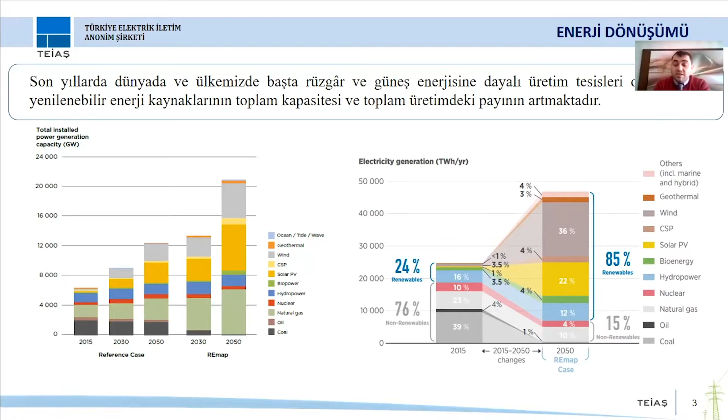When we look at the share of renewables in total generation, we have 24% from renewables at the moment, but in the future the share of renewables will increase to 85%. More than 50% of this will be coming from wind and solar energy.

When we look at the last 5 years for Turkey, we can say that in 2016 the total grid installed capacity was about 73,000 megawatts, and 41% of this came from renewable resources, out of which about 57% came from solar and wind power. But as of April 2021, the total installed capacity is almost 100,000 megawatts, or 96 gigawatts, and the solar and wind capacity has increased by 15%.

So in the upcoming period, for the solar and wind capacity, currently we have allocated 18,000 megawatts for wind and 12,000 megawatts for solar. For the coming period, within the existing grid structure in this energy transformation, the renewable energy resources, especially the solar and wind energy capacities, are going to be addressed in terms of finding solutions for the generation issues.

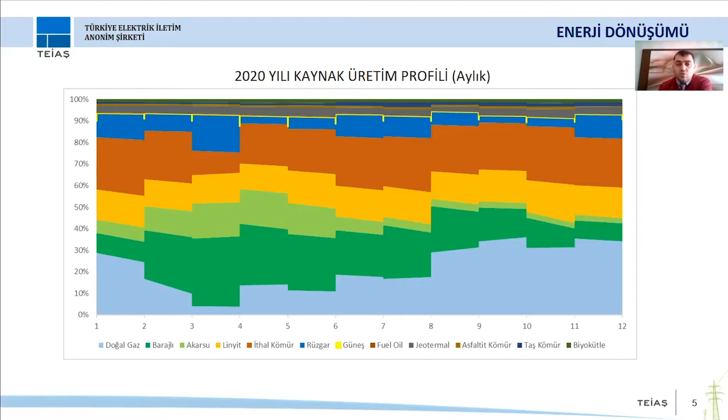So these capacities, according to future wind and solar capacities, we can say that in the future we're going to have more of these challenges. When we take a look at the solar and wind penetration compared to conventional resources, for 2020 the maximum wind and solar generation, hourly generation and penetration, was about 23%.

But we also have to say that generally when generation is low, the penetration of solar and wind is kept available at all times, and when we have minimum consumption and maximum solar and wind generation, the grid operation or management will be difficult. This is what the graph shows us.

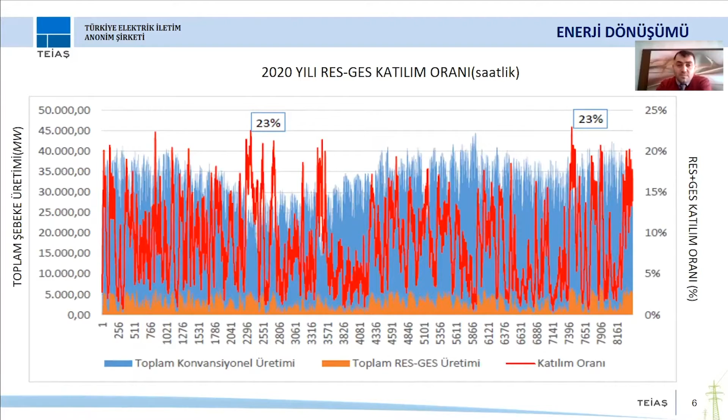So what is grid flexibility? It's about managing the demand and supply with minimum cost in the best feasible way. So we have this increasing renewable energy and these changing generation conditions. We need to increase the flexibility both on the supply side and demand side.

For instance, for the net load, we need to be able to monitor the supply according to the net load and manage the demand accordingly. But of course, what we need to do is make sure that supply is provided at all levels of the grid. So in grid operation, we need to invest in the grid operation and expand the grid accordingly through investments.

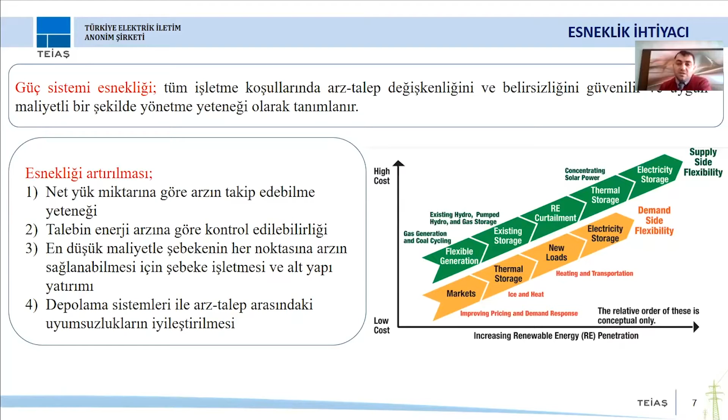But these unbalanced scenarios, coupled with increasing demand, require certain changes. There might be some restrictions in the wind or solar energy generation, or we can overcome this lack of balance through storage facilities. On the consumer side, again, storage facilities and systems are going to be an important alternative. And of course, in systems where we can control the market participation of consumers, we can increase flexibility.

Let's take a look at the energy storage systems. What are they and what's their role in increasing the flexibility?

We can assess them from two perspectives. One is that energy storage can take place in the form of storing the energy and using it whenever needed or required, or the electricity generated through the energy resource can be stored. So there are two ways of energy storage: it pertains to consumption and generation. There is a two-way utilization of this, and in terms of grid flexibility, this is an important opportunity.

So energy storage systems and methods can be classified under 5 different groups: electrochemical storage, mechanical storage, chemical storage, thermal storage, and electrical storage.

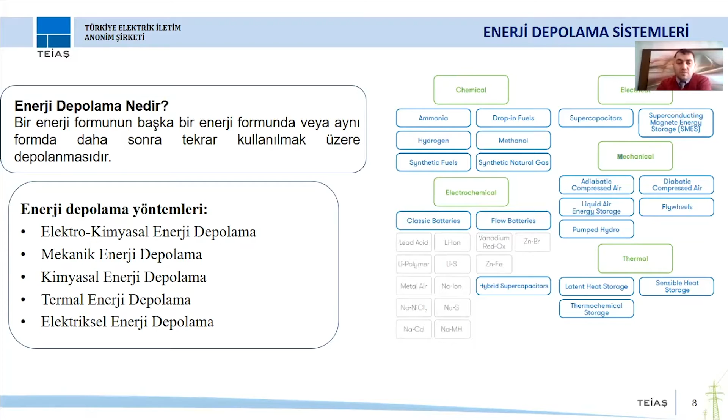So these are the methods for storing energy. Briefly, let's go through some examples. Mechanical storage methods are composed of pumped systems and compressed air storage, and then we have thermal storage carried out through molten salt, heating or cooling through concrete, or other thermal methods.

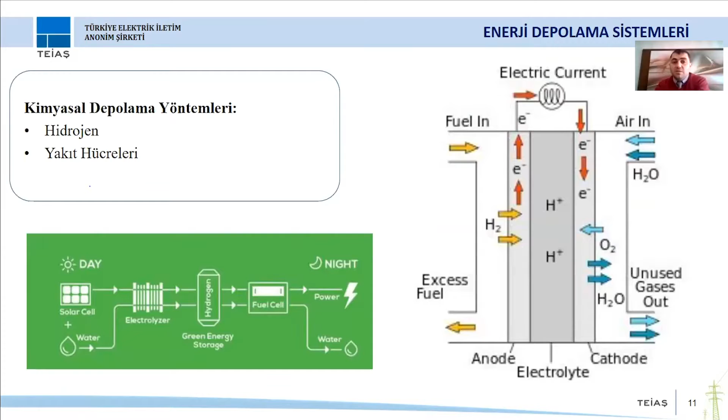What about chemical storage methods? They are done through hydrogen and fuel cells. Other electrochemical storage methods are composed of batteries, of course the liquid batteries: lead acid, lithium ion, sodium sulfur, and nickel cadmium. These are the electrochemical storage methods.

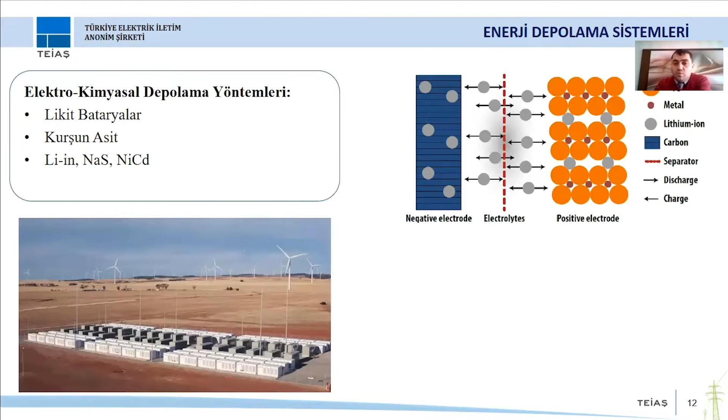And lastly, about electric storage, we have supercapacitors and superconducting magnetic energy storage systems.

Comparing these storage systems, we can say that there are many different applications, varieties, and methods for storage all around the world. In terms of technology, we have different means, but most of them are still at the research and development phase, and some of them are recently being implemented. Maybe in the coming years, storage systems will be using new methods and new applications will be there.

But looking at the current situation, we can say that all around the world, the main method is the mechanical method, and these are actually the pumped hydro storage systems. And for batteries, we can talk about lithium-ion, sodium sulfur, and lead acid batteries that are highly advanced and developed.

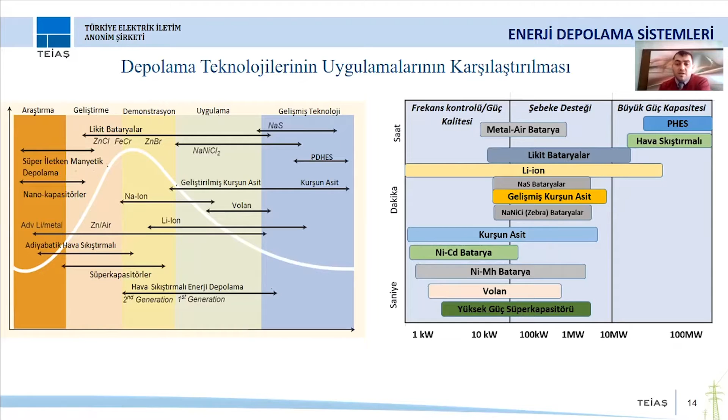Again, in terms of the services they can provide and the duration of those services, we can say that pumped hydro storage systems are used at large grid levels, from seconds to hours, within the grid. And we have supercapacitors, developed most recently, which can go up to megawatts within the grid.

So in terms of grid applications, what kind of services can be there? In terms of supply and demand, we can use these storage services. They can be applied to many different services, but looking at the main ones, we have energy storage and control systems, frequency control, spinning reserves as we call them, voltage regulation, and black start as we define it. These are the auxiliary services.

Then in terms of infrastructure services, we have investments regarding the grids. So we can use the grid infrastructure for reserves, and this can be used to defer the investments as an alternative.

And finally, customer energy management services, which is valid for all consumers. So use of battery technologies is going to be an important alternative in the future.

Let's take a look at the use cases for these systems. As I said, pumped hydro storage systems are used all around the world, totaling higher than 160 gigawatts. Then we have thermal storage systems; the molten salt method is used all the way up to 2.5 gigawatts.

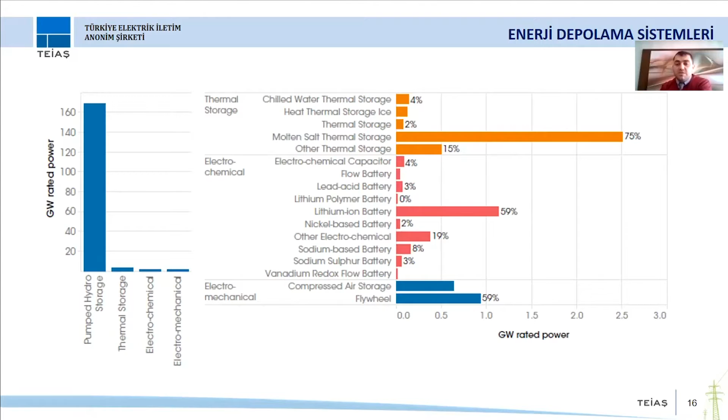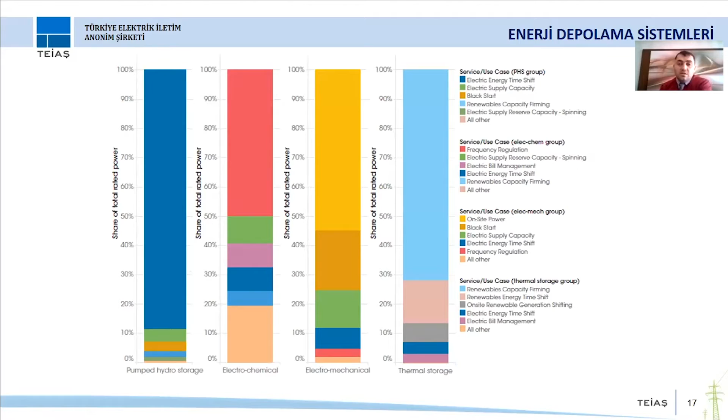And the most used electrochemical method is lithium-ion batteries, used all the way up to 1 gigawatt. Looking at the use cases for grid operation, we can say they are used to control energy, deferral, frequency regulation, and creating reserve capacity. So pumped hydro and electrochemical batteries are mainly used in these areas.

So we can say that for the Turkish electricity system, for the upcoming years, looking at the use cases for energy storage systems, they can be used to cater to the need of supply and demand balance, provision of ancillary services, and they can be used together with renewable energy resources.

So as TEİAŞ, in terms of storage systems, what have we done so far? As you know, in the last 2-3 years, we had ongoing projects within the framework of which we have worked at an institutional level. Let's go through what we have done.

First of all, concerning the storage facilities, we have had some academic research and practical research. We have identified a roadmap, we have prepared reports, and we made a needs analysis for Turkey, trying to see how we can use storage systems for the upcoming period.

In terms of the existing or current situation of storage systems in Turkey, what is the existing situation? We assessed this and what kind of future facilities we can have. We had certain cost benefit analysis for TEİAŞ and for our country.

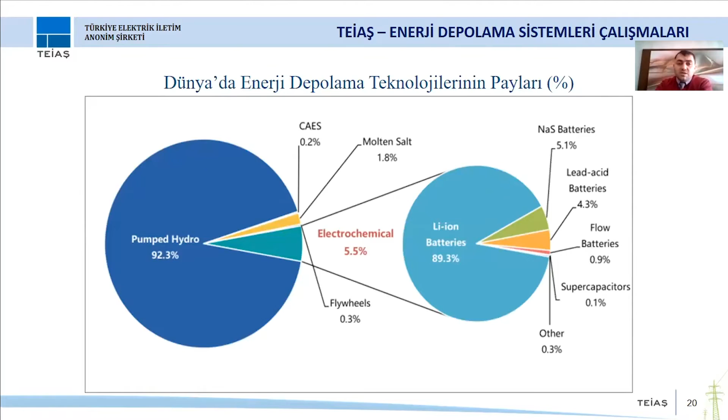Looking at the breakdown of renewable energies in other countries, we can say that many countries such as Austria, where there is high renewable energy potential, and Denmark, for instance, with high wind potential, or Japan, Germany - pumped hydro systems are already installed to a certain extent.

However, in our country, looking at our existing installed capacity for renewables, although we have a potential of about 32% for pumped hydro, currently we do not have any existing systems.

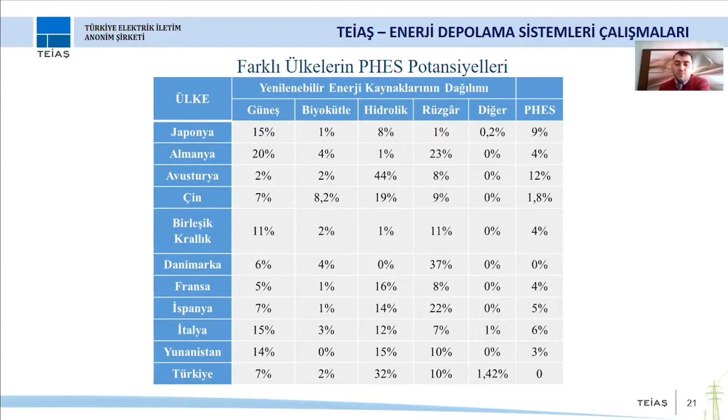In 2016, a research activity was carried out by the European Commission. This shows the water reserves and topology of different countries and comes up with their potential pumped hydro systems. Turkey, compared to other European countries, has a great advantage, as the research indicates.

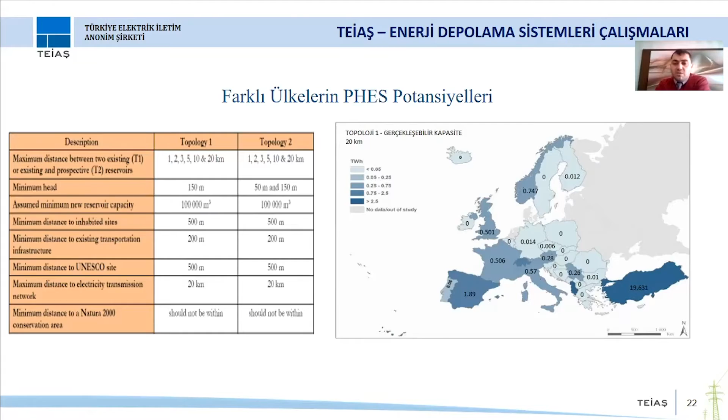After this research, the Japanese JICA agency also carried out another research. For Turkey, they have identified 6 locations for pumped hydro systems to be established. This is included in the investment program by EÜAŞ, and a planning activity is done accordingly.

So, this is the Gökçekaya pumped hydro, 1,400 megawatts.

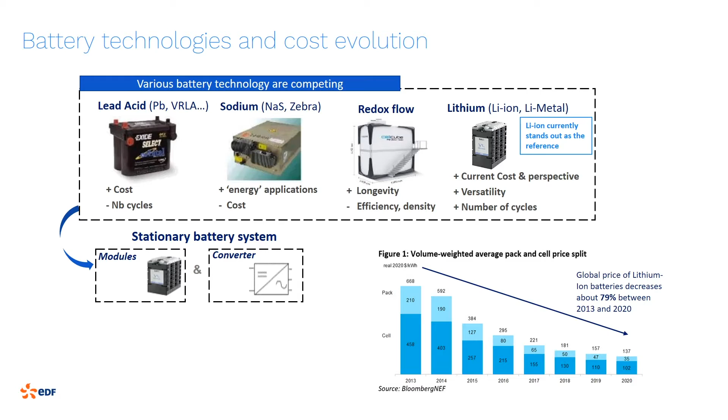It is feasible from a technological point of view, but it doesn't mean that this is economically viable. It will depend on the context and on the specificity of the electrical system.

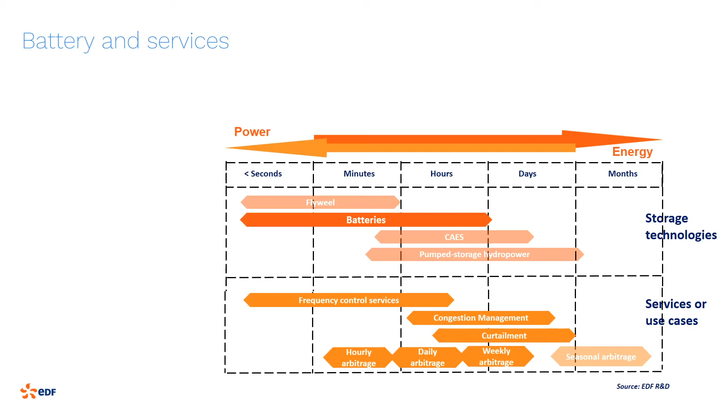As examples, EDF has several battery projects used for frequency regulation. The McHenry project in the USA has a 20 megawatt capacity and is operational. An extension of this installation is currently under project to achieve more than 60 megawatts. EDF also won a 49 megawatt bid at the 2016 call for tender by National Grid in the United Kingdom. And there are also several projects for frequency regulation with batteries in French islands.

New services are rising for batteries, such as fast frequency response. Technological issues due to high penetration of renewable energy lead to the use of batteries.

In particular, in islands, the use of storage for frequency regulation enables sound business models. Battery storage can provide synthetic inertia, which is useful in islands, especially with high renewable energy integration.

In England, recent calls for tenders have been launched on a new enhanced frequency response service. Ireland has also proposed such a new ancillary service.

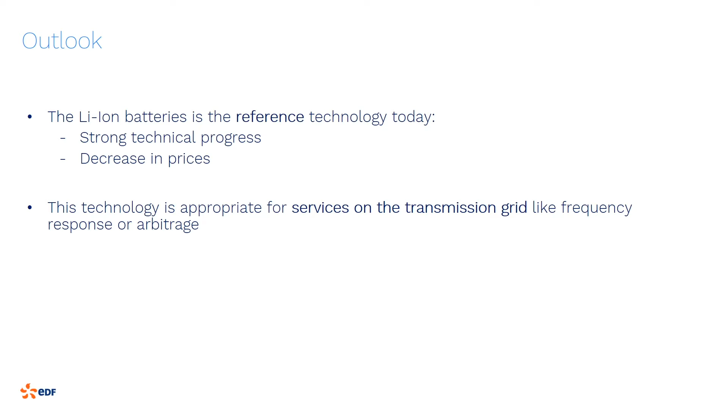The second part of the presentation is about the key outputs of the IPA 2013 CS01D Analysis of Energy Storage Systems project with TEIAS.

The project started in 2018 and ended in 2020. The objective of the project was to assist the Ministry of Energy and Natural Resources of Turkey and Turkey's transmission

and system operator TEIAS to develop a vision of the future of battery storage in Turkey for some selected use cases. To achieve this objective, EDF offered a large panorama of storage in the world.

More specifically in Europe, an analysis of the different technologies of storage has been performed, and a presentation of some relevant and current battery projects in the world was done.

Technical concerns, regulation frameworks, and incentives have been exposed.

The second objective of the project was to identify and discuss the potential of battery storage in Turkey. For two main services this has been done: congestion, and primary and secondary reserve.

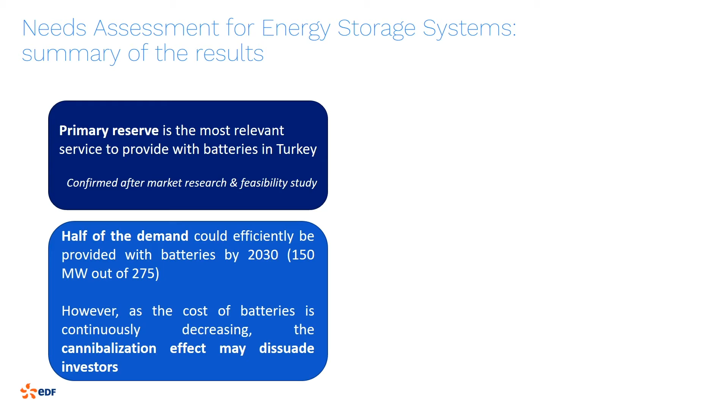Finally, EDF demonstrated that other grid-scale services have no economic interest for Turkey.

So the following services are not economically viable: arbitrage, renewable energy source smoothing, fast primary reserve, secondary reserve, and congestion management.

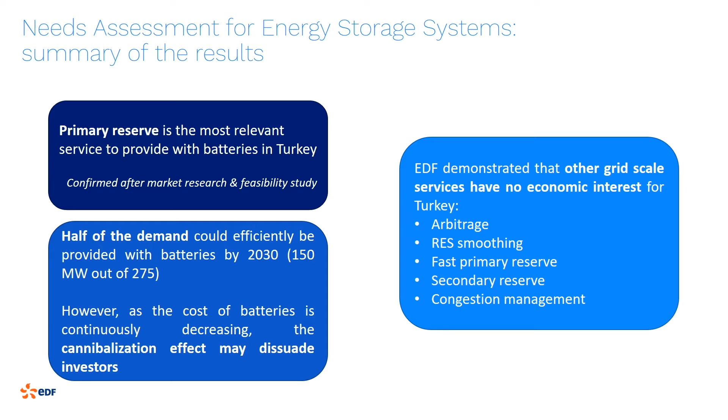Another important outcome that I would like to emphasize is the capacity building provided within this project. The workshops and trainings held during the project have been the occasion to transfer knowledge and discuss with the participants.

The results of the survey show that these meetings have been successful.

The site visit in France was the occasion to discuss further with all the EDF research and development experts about batteries and also benefit from their experience.

The tools developed within the project regarding battery modeling for different services - congestion management, primary and secondary reserve, arbitrage, and RES smoothing -

have been transmitted to the client during a training and are easily understandable thanks to associated user guides.

EDF has transmitted its theoretical knowledge and experience. The trainings were also a chance to run applications for the Turkish system, and the client now possesses all the capabilities to deal with the subject of energy storage.

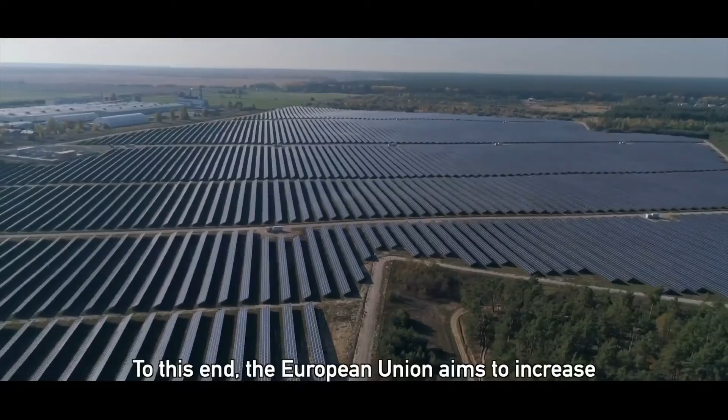Enerji, insanların yaşamlarını sürdürebilmeleri için gerekli bir kaynak, ülkelerin refahını sağlamak için de en önemli araçlardan biridir. Artan dünya nüfusuyla gittikçe tükenen hidrokarbon kökenli enerji kaynaklarının yanında, yeni ve yenilenebilir enerji kaynaklarının kullanımını arttırmalıyız. Bu doğrultuda Avrupa Birliği, iklim değişikliğiyle mücadele amacıyla enerji verimliliğinin ve yenilenebilir enerji kaynaklarının payının arttırılmasını hedefliyor. Biz de bu hedef doğrultusunda ülkemizin artan enerji ihtiyacını karşılayarak enerji arz güvenliğini sağlamaya, enerji alanında ülkemizin rekabet edebilirliğini artırmaya ve sürdürülebilir kalkınma temelinde çevrenin korunmasına katkı sağlamaya çalışıyoruz.

2007 yılından bu yana enerji sektöründe kapasitenin geliştirilmesi için Avrupa Birliği finansmanıyla toplamda 106 milyon avro tutarında proje yürüttük ve yürütmeye devam etmekteyiz. Elektrik alanında uygulanan projelerle ülkemizin elektrik sistemi, Avrupa'nın elektrik sistemiyle uyumlu hale getirildi ve elektrik piyasamız geliştirildi. Bilinçli enerji tüketiminin sağlanabilmesi için enerji verimliliği projeleriyle binalarda enerji kimlik belgesi uygulamasına geçildi ve enerji tüketen ürünlerin enerji tüketimlerine dair bilgilendirmeler ürün ambalajlarında yer almaya başladı.

Enerji verimliliği ve yenilenebilir enerji alanında Türkiye'nin uygulamaya koyacağı eylem planlarının hazırlıkları da yine Avrupa Birliği finansmanıyla yapılan projeler kapsamında tamamlandı. Daha iyi bir dünya ve ortak geleceğimiz için doğaya daha az zararı olan yenilenebilir enerji kaynaklarından faydalanmak amacıyla Avrupa Birliği ile çalışmalarımıza devam edeceğiz.

Değerli sektör paydaşlarımız, bilindiği üzere aday ülke olarak Avrupa Birliği tarafından sağlanan katılım öncesi mali yardım fonlarından istifade ediyoruz. Enerji ve Tabii Kaynaklar Bakanlığı olarak ülkemize tahsis edilen IPA fonları ile enerji sektöründe kapasite geliştirme çalışmalarını gerçekleştiriyoruz. Bu kapsamda IPA fonları ile 2007 yılından bu yana enerji sektöründe toplamda yaklaşık 106 milyon avro tutarında teknik yardım ve pilot ekipman alımı projelerini yürütmekteyiz.

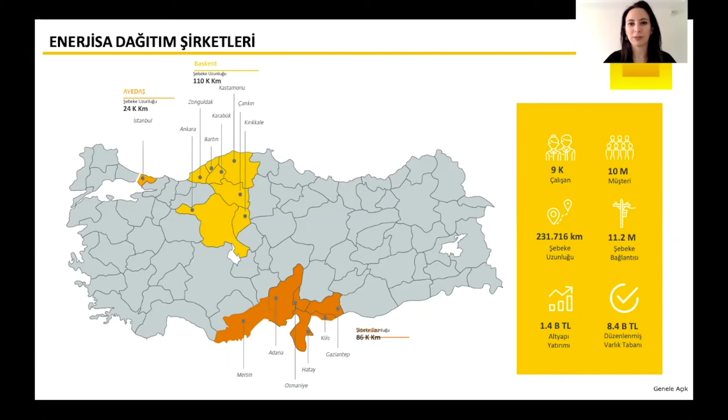It's an umbrella company established by E.ON and Sabancı. Under this umbrella company, we have the distribution companies. Taking a closer look at the distribution companies, we can say that we have three regions: AYEDAŞ, Başkent, and Toroslar. We have 9,000 employees serving more than 10 million customers. We have a network of 231,000 kilometers.

For sustainable, uninterrupted energy, we can say that it's one of the most important criteria in terms of establishing social welfare and in terms of the development level of societies. When we take a look at the energy sector today, we can say that all the investments are made to cater to the increasing demand. With the increasing population and urbanization, the demand for electricity is increasing every day.

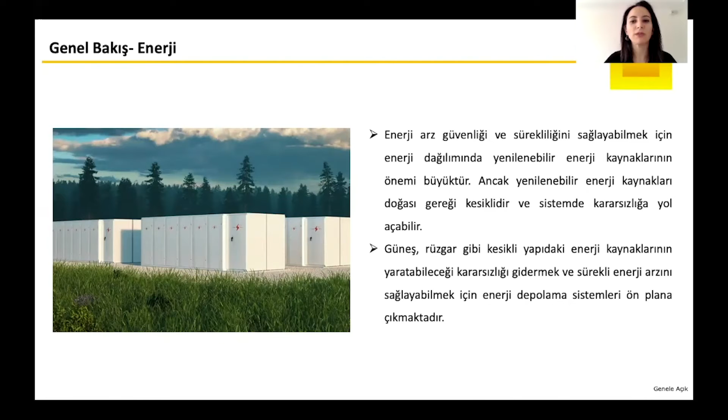Today, energy generation and consumption is mainly based on fossil fuels. We have increasing carbon emissions, air pollution, and problems regarding access to energy resources. In terms of resource use, the situation is not sustainable. So in order to have security of supply, we need to also focus on the role of renewable energy resources. But because of their nature, renewable energy resources are intermittent and they might cause instability in the system. To overcome this instability caused by renewable energy resources such as solar and wind power, we actually need storage systems.

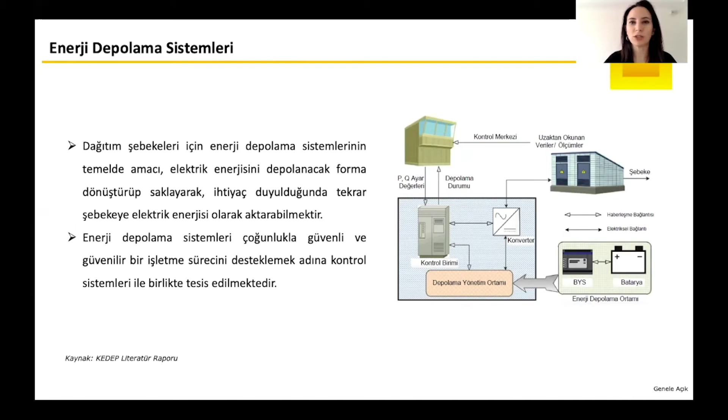For the distribution grids, the main purpose of energy storage systems is to make sure that we convert the electrical energy into a storable format and transfer it to the grid whenever needed. The energy storage systems are mostly established together with control systems in order to have a safe and reliable system. Energy storage systems are becoming more and more prevalent because of their technical, economic, and environmental advantages.

In terms of energy storage system applications, we can talk about 7 subtitles: energy ancillary services, transmission infrastructure services, distribution infrastructure services, energy management services, off-grid systems, and transportation.

Looking at the energy services, we can talk about arbitrage, or energy time shift. It's about storing the electrical energy when the price is cheap and selling it when the demand is at its peak.

Supply capacity control, or additional load capacity, is about use of the energy storage for upgrade deferral. We need to monitor the changes in the load constantly and provide power to the grid, or take power from the grid instantly, in order to overcome frequency change problems within the grid.

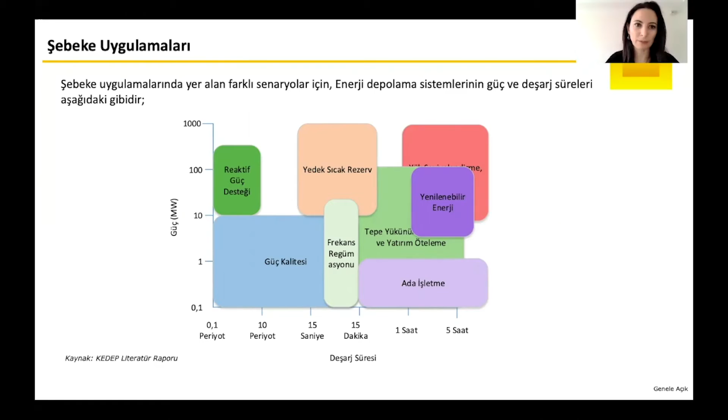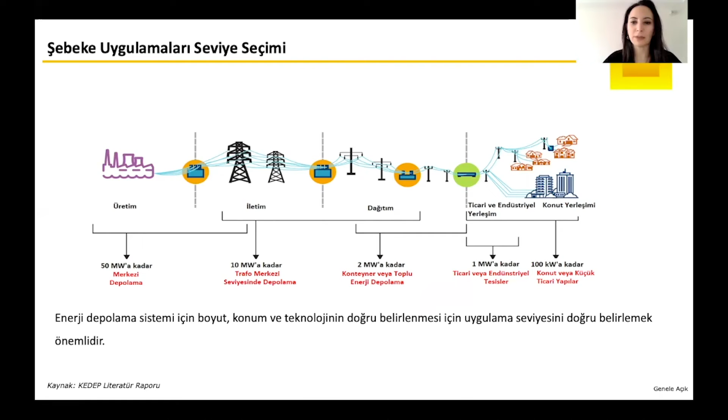For the grid applications, when choosing the storage systems, first of all we need to see at what distribution level the application will be connected to the system. This is very important. The storage systems, from generation to consumption to location, at many different levels they can be connected to the grid, and the energy storage systems' size, location, and the identification of the right technology is all about choosing the connection level rightly.

So we talked about these grid applications, and almost all of them are to be seen in many areas, from generation to consumption of energy. So looking at the energy storage technologies, we can actually see three different mechanisms: mechanic energy storage technologies, electric and magnetic energy storage technologies, and electrochemical batteries.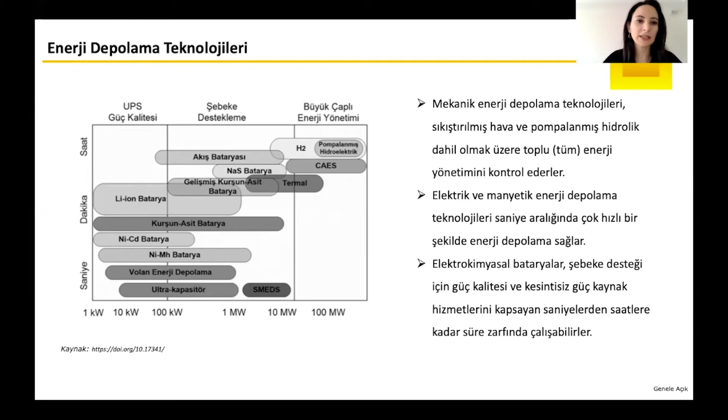Mechanic energy storage technologies is about compressed air storage and pumped hydro, and they control energy management. For electric and magnetic energy storage technologies, we can say that they are very fast in terms of storing the energy. And for electrochemical batteries, we can say that they include grid support, power quality, and uninterrupted power for the quality of the grid.

So for different grid operations, we need to select the right type of technology. Looking at these technologies, we can say that they are actually implementable at various different levels. But among these storage technologies, in the last years, we are seeing that lithium-ion storage technologies are at the forefront. They have high productivity and high energy intensity. That's why they are frequently preferred in

mobile electronic devices. Lithium-ion type batteries are the fastest developing chargeable batteries, and you don't need to charge them fully or discharge them fully before using them. Especially in most recent years, with the expansion of electric vehicles, lithium-ion batteries are finding huge growth in the market.

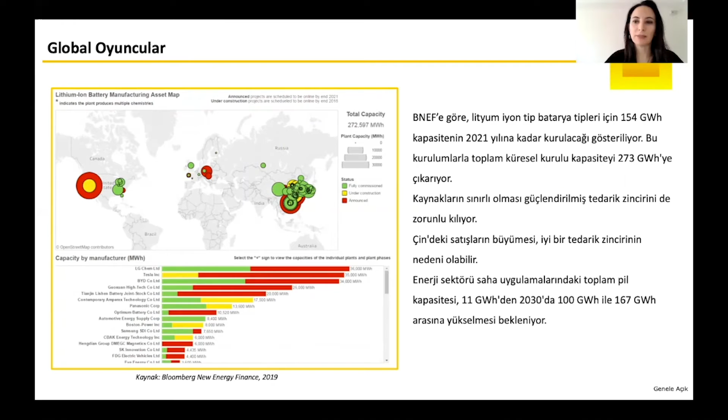According to a study carried out by Bloomberg, for lithium-ion type batteries, by 2021 we are going to have 154 gigawatt hours of capacity to be installed, and with this new installment, the total installed capacity is expected to increase to 273 gigawatt hours. We have LG, Tesla, and BYD as the global manufacturers, the main actors in this sector.

What about the outlook for the future? Especially in the beginning of the 2010s, we had $1,000 per kilowatt hour as the price, but this went down to $100 in the beginning of the 2020s. With the recent developments in technology, we are seeing a decline in the price of battery technologies, and they are becoming more and more affordable.

So what about the applications in Turkey? In Turkey, with the support of EMRA and under the coordinatorship of ELDER, the Electricity Distribution Services Association, we have an effort to have pilot activities to compare the grids, and we are carrying out the KEDEP project, the Chemical Energy Storage Project. In this project, we have chemical type energy storage systems and lithium especially. We are trying to achieve grid efficiency with the installment of lithium batteries at different capacities and functions.

So we want to overcome the outages created by overloading of the grid, or we also want to overcome the outages in technical losses. So 6 distribution companies are going to have pilot practices, and at the end the results of the activities will be assessed, and they will be used as an input for the preparation of new legislation.

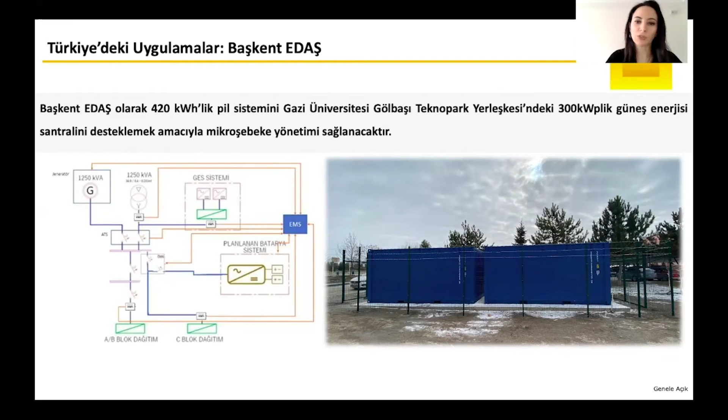Within this framework, we have Başkent EDAŞ, that's going to provide a microgrid at Gölbaşı Technopark area, and we have 300 kilowatts peak of solar energy to be supported, and we are expecting the project activities to be completed by the end of the year.

Another renewable energy plus storage application is done at Toroslar EDAŞ. Again, this is supported by EMRA, and in remote units such as forests or villages, in order to support the grid and increase the renewable energy installed capacity, we are working on an 8 kilowatt solar power and 9.6 kilowatt hour lithium-ion battery system.

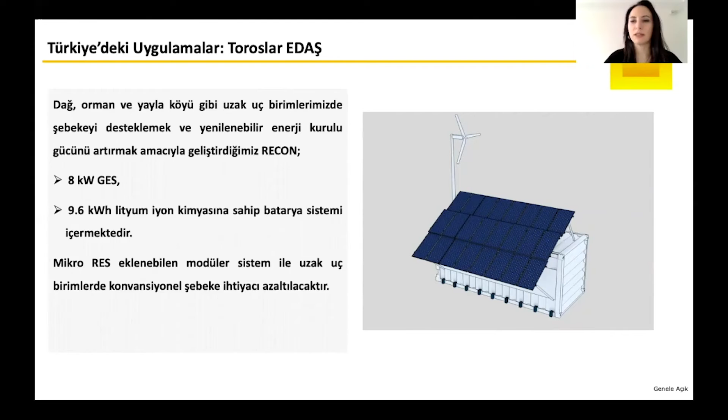And this is a modular system to which we can add wind power as well, and we are trying to decrease the need for conventional systems.

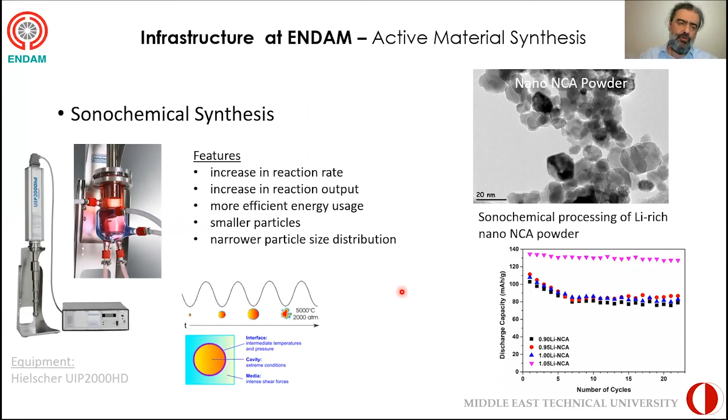And in this framework, we are focusing on some methods that are widespread across the world as well, like sonochemical, for example, is a method. And with this method, we can produce particles at nanometer levels, and they can have superior qualities. And we have an activity here where we have very small particles, active material that we can produce through this method. And so we have been acquiring materials with superior features. We are focusing on that. This is one of the methods.

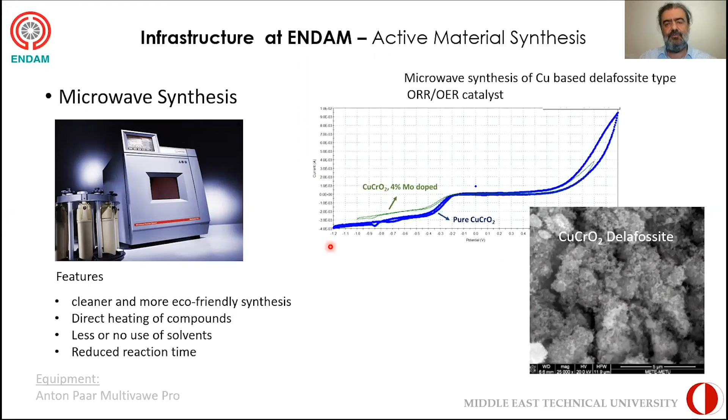And the main target of these approaches is to be able to quickly, efficiently, and functionally produce material. I mean, yes, you can produce this material with other methods as well, but when you compare it with the properties of the materials produced with these methods, you can see a significant difference. And of course, that is very important for producing material with superior features. So these methods provide an advantage to us.

You may need to cover them with carbon for conductivity, and of course, it has to be at nanometer levels. And for carbon coating, we can also do that with this method as well. So that's why all three methods are very important in providing us with the opportunity to produce material with superior features. We have had a lot of publications about how this material is being produced and about reviewing their performance and their qualities. And in the end, as part of our studies in ENDAM, one of our main goals is to develop materials and also to develop the material production processes.

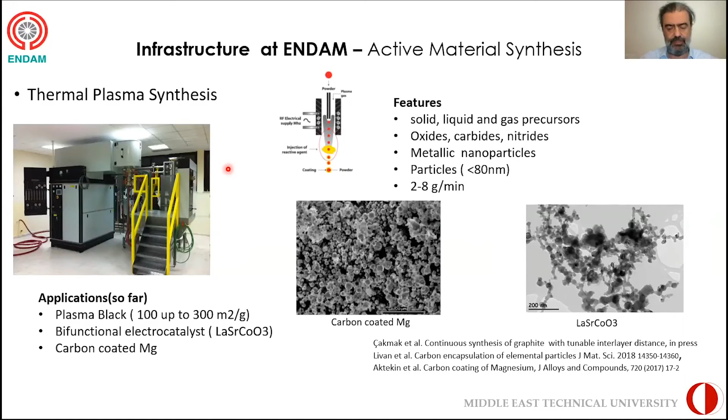So all of this is done for a single goal, and that is to enable energy storage devices which are more superior. And of course, another goal we have is device fabrication. So what we mean is basically to be able to fabricate a battery that you can see solidly and which you can use in various applications.

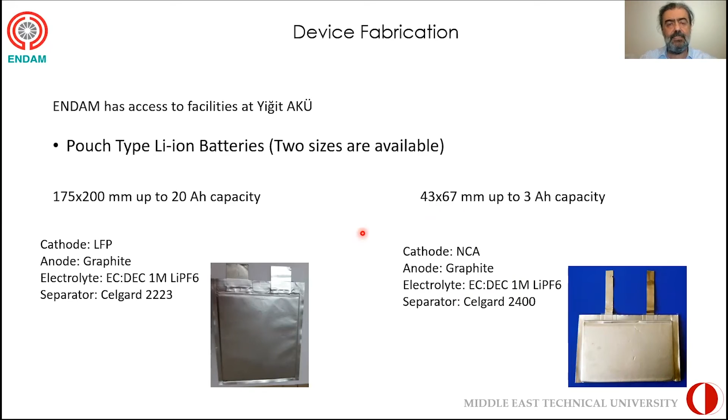Now, this device fabrication infrastructure was developed together with the industry. Mostly we worked with Yiğit Akü, the battery company, and we mostly focused on lithium-ion batteries, specifically pouch-type lithium-ion batteries. We have the structure to fabricate these devices, and we have two different dimensions for pouch-type batteries: 20 Ah capacity with a size of 175 by 200 millimeters, and 3 Ah capacity at 4.3 by 6.7 centimeters.

Basically, we have two different capacity targets for our pouch type lithium-ion batteries, and we are able to fabricate these. Another goal that we have is to test materials, whether it's material produced by us or material that we receive externally. Basically, we have been formed to serve the academia in general as well.

So we want to be able to assist our friends in the academia within our means, especially for electrochemical characterization activities. And we try to provide support, and we have been providing some substantial support. We have worked together with many of our colleagues, and we take the material that they have and turn them into batteries, and we apply all the items that you can see here.

We look at the cycle life capacity determination. So we run all these tests, and basically what we do is test the active material. It could be material that was produced within our center or externally, but we are trying to meet their needs in characterization.

Another approach that we have is to serve the industry, and that is, batteries that have been purchased from abroad are used a lot in the industry. So we run battery testing for these devices because the industry really wants to see the characterization of these batteries. They do receive some documents when they purchase the battery, but sometimes in terms of implementation, it is unknown whether or not this battery will meet their needs.

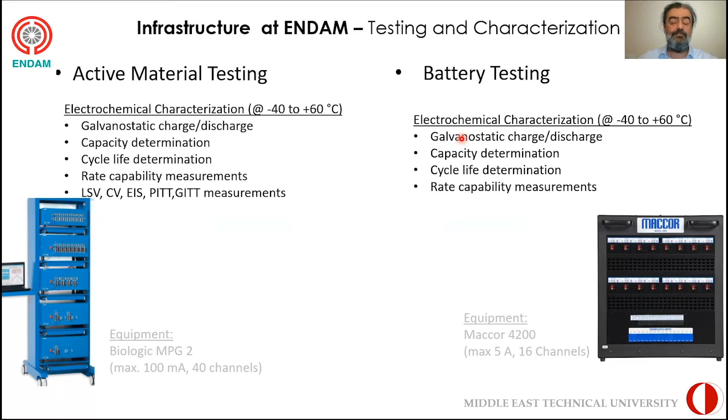So in that sense, we are testing the entire battery as well, not just the active material. And we are trying to serve the industry in this sense as well. And we have quite a good infrastructure in this area as well. It is quite satisfactory, and it can serve a variety of needs.

And we don't only focus on electrochemical characterization, calorimetric characterization is also very important. One of the main needs for this is electric vehicles, because the standards in electric vehicles are quite high. I mean, the heat capacity to understand what kind of damage there could be in the case of a collision. That is some important criteria, and these criteria cannot be tested with traditional methods. So very special devices are required, and with the setup we have in our center, we can also test these batteries.

Especially for the determination of thermal runaway. What we are talking about is one part of the battery heating up too much, and that can become explosive or flammable. This is very critical, especially for electric vehicle manufacturers. Both in Turkey and across the world, these tests need to be conducted with great precision. So with the infrastructure that we have established, we are able to serve this purpose as well.

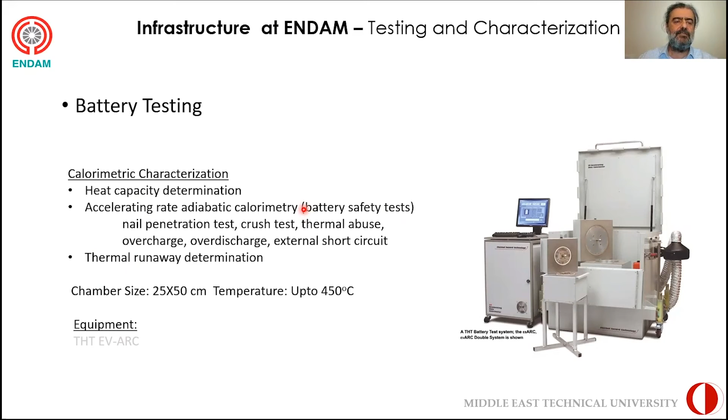And we gradually open this up to our industrialists as well, so battery testing can be done at world standards. We have that capability at our center.

So I would like to focus on our publications a little bit. I won't go into all the details because if I were to go into them, it would take very long hours. But basically, I'll give you some brief examples. We have various patents and various publications that are listed here, but I can quickly go over these.

Now, in terms of supercapacitors, as you know, in terms of high power intensity, they are preferred vastly in many areas. And again, this is the case for electric vehicles as well as some other purposes. Also for grid energy, they can be used, but mostly they are used in hybrid structures. So there is a battery, and it works in a hybrid manner together with the battery, especially in vehicles and buses.

For heavy vehicles, it is very important because when you want to accelerate, you need to go to very high levels of current, and we can support that with supercapacitors. We highlight activities and studies in this area, and developments across the world are quite rapid in supercapacitors as well.

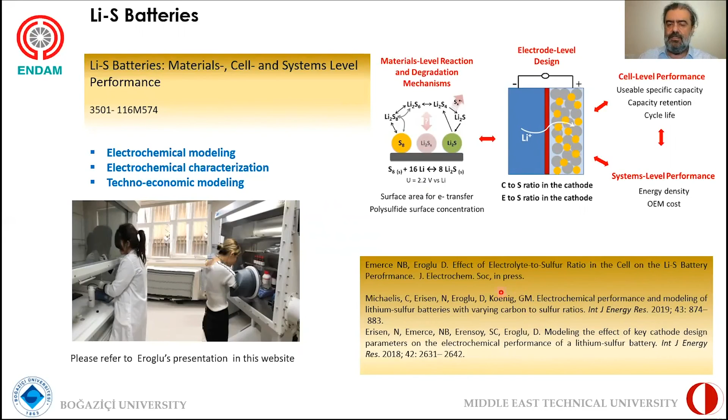They have a very high capacity chemically. However, they do have some problems within themselves, and these problems have been worked on very intensely for a decade now across the world. We are exerting our own effort to overcome these problems, both in terms of modeling and experimental studies. We are working to enable the commercialization of these types of batteries. You can see our publications here, especially together with our colleagues at Boğaziçi University, who have contributed to this research as well.

Lithium-ion batteries, of course, is an area we work on quite intensely, and we are seeking new compounds that are not very familiar to the world. So we have some groundbreaking goals here, actually.

This doesn't happen overnight, of course. We've been working in this area for a long time, and we have acquired some different compounds. Although they don't have the potential for commercialization right now, we believe that could change in the future.

We also need to further develop currently known materials, because materials being created today have different qualities depending on the manufacturer. For electric vehicles, materials need to have superior features. The same material can have different performance based on the method being used, so you can see different features in materials provided by different manufacturers.

For very long years, we have been focusing on producing materials for electric vehicles, and we have made a lot of progress here. We have NMC, which is an oxide, and we also have the cobalt oxide that we use. We have various patents and publications in this area, basically aimed at making lithium-ion batteries more cost efficient, enabling further range, and boosting security in electric vehicles.

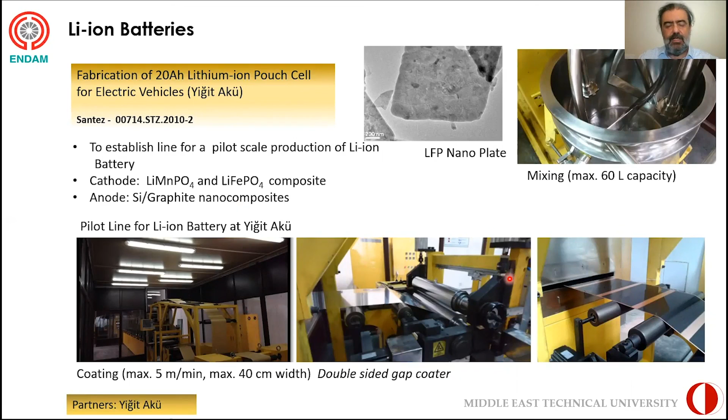In that sense, within the umbrella of Yiğit Akü, we have a battery production line. It's quite an industrial line, not really like a lab. As you can see, we have coating, and it goes through the calender, it's mixed. So it is a fully functional production line, and we are able to produce industrial level batteries there.

Here you can also see the production of batteries and how that is completed. Another activity we had was on NCA. We worked together with Aselsan, and as you can see, this is a smaller scale battery, and we have a homogeneous distribution of particles here in the active material.

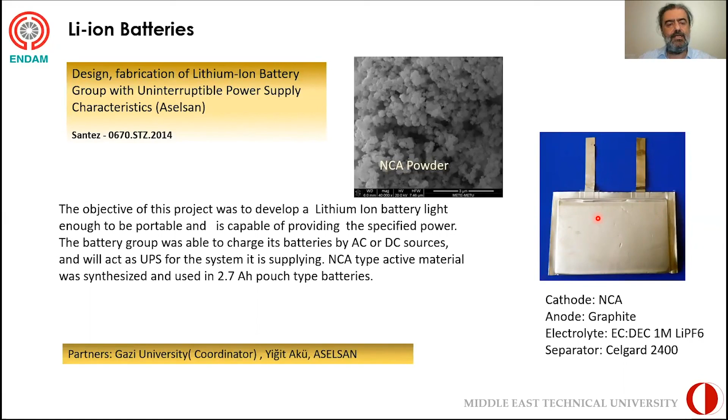We didn't just produce the material, we also transformed it into a battery, and we actually packaged it. A pack of 48 was packaged all together, and we turned it into a module, and we conducted our tests there as well. For sodium-ion batteries, the activities were very important as well, and we also have a pending patent in this area. We had anode and cathode active materials that we focused on developing.

As I mentioned earlier, the materials used in the chemistry of lithium are quite strategic. They aren't existent in every part of the world, and they can be influenced quite easily by fluctuations across the world. There can be some limitations imposed sometimes on their imports and exports.

When we look at recent studies and activities in Turkey, there have been a lot of developments in this area. In terms of nickel, there are Meta Nikel facilities. In terms of cobalt, there are new facilities that have been built as well. But when you look at it, these are all strategic materials.

But sodium is not like that. Sodium is distributed equally across the world, so it doesn't have strategic importance, because basically if you are close to the sea, then you have sodium. You can also acquire sodium if you are close to any saltern.

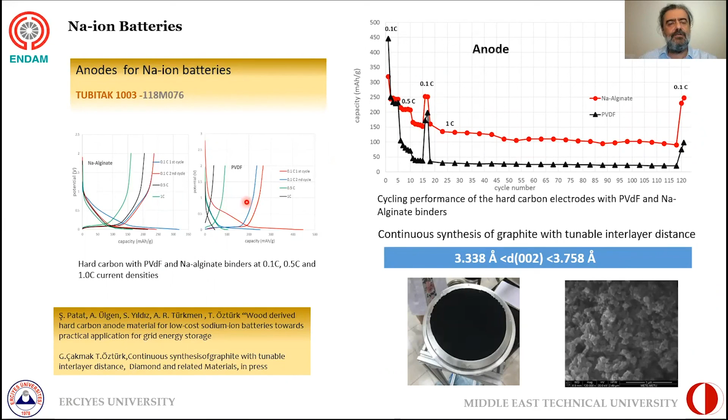So we are working towards producing these types of batteries as well, and we are quite keen on it. We also have some activities in this area. I won't go into the details, but we have a pending patent and some publications in this area, and we are experiencing some significant developments.

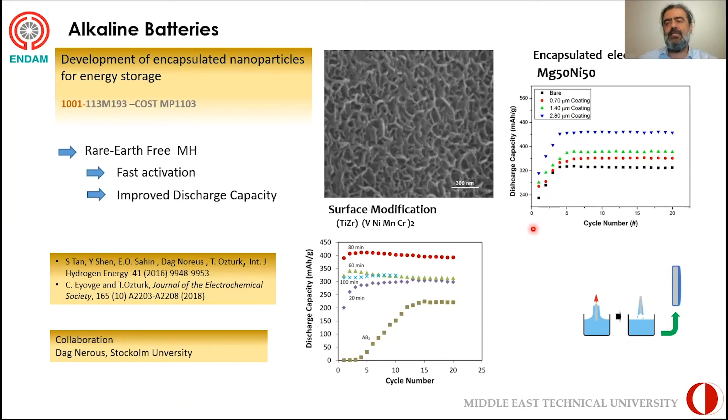So alkaline batteries - yes, their use is decreasing across the world, but they are still quite an important type of battery. One of the challenges here is the rare earth element active material. These elements are mostly under restrictions by China, so there are certain quotas, and you can't access the material sometimes when you want to. With the activities we have conducted in this area, we tried to create compounds which don't contain rare earth elements, and we created quite superior featured battery materials with these studies.

Another approach - it's not just for alkaline batteries, but it's also part of the TÜBİTAK project we are carrying out right now. It's part of the lithium-ion batteries, and we call this the combinatorial approach.

So our ongoing research themes - this combinatorial discovery is very important, as I mentioned. For lithium-ion batteries, cathode material development is a never-ending effort for us, and for anode materials as well we are carrying out our activities, and also for sodium-ion batteries.

Another issue is something we started working on with a slow pace, and that's fast ion conductors for solid-state lithium-ion batteries. Now, this is a very important aspect because mostly liquid electrolytes are used, and they can be flammable. For that reason, solid state materials are very important, and this will be a very important achievement. It is also a study that is conducted widely across the world.

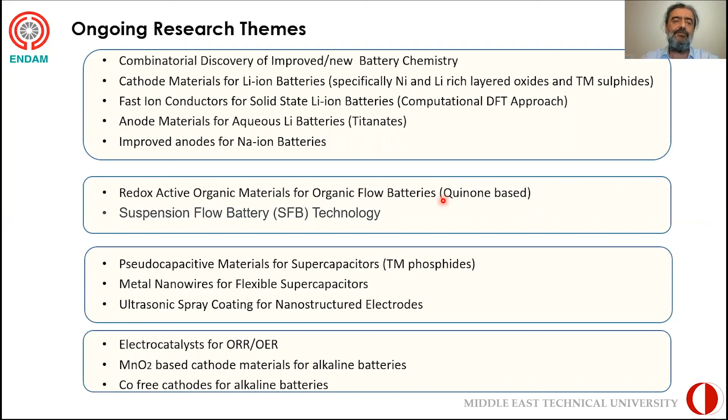So briefly, that's what we have been focusing on. Thank you very much for listening to me. If you have any questions, you can access me through email. Thank you very much, goodbye.